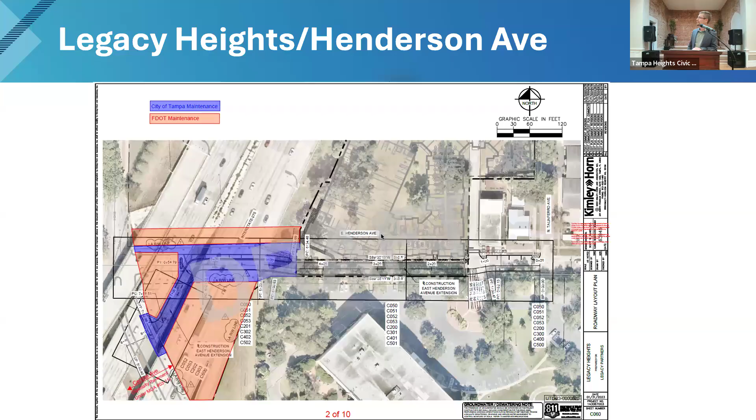The next thing I wanted to talk about is the West River Network build project. You've probably seen some of this in the news, and maybe some of the construction ongoing. I was going to talk a little about the segments on this side of the river.

That would be segment 5, the Columbus Drive segment, and segment 6, the connection down through Ridgewood Park. When all is said and done, we'll have a loop of the Riverwalk system connecting all the way down to Bayshore, giving an active transportation connection throughout downtown and on the west side of the river in West Tampa. But let's focus on the segments in question.

On Columbus Drive, we are building a cycle track across the bridge. There will be one less driving lane, but there will be a protected connection between the east and west sides of the river. We are working with Hillsborough County, since Columbus is owned and maintained by the county, and they are providing some of the funding for this project.

Basically, they are providing the amount they would have spent on resurfacing those segment limits, which go from Boulevard to Rome, past Ridgewood Park. So they're funding part of it because they otherwise would have done maintenance there, but the amenities we're bringing with this project are a step above. It's a true funding partnership between us, the federal government through the grant we were awarded, and Hillsborough County.

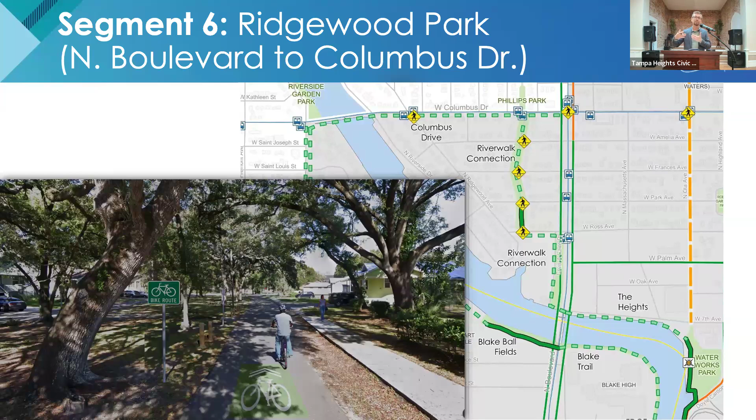So the question was, will we have areas to connect between east and west throughout the length of the Riverwalk? If you can go back to the map - there is a primary connection on the north end on Columbus and then through Ridgewood Park that directly connects back to the existing Riverwalk.

We have some active connections at our crossings across the river, particularly Cass, where we've got what we call the quick build cycle track. Brorein is not part of this project, but we have some preliminary ideas for a potential connection there. Brorein right now has 4 lanes coming across.

It splits into 2 to continue westbound and 2 to go down Bayshore. That decision point can be a little confusing to motorists, and it's not a great place to cross the river as a cyclist or pedestrian. So there's an opportunity there.

There will be opportunities for us to make incremental improvements to the whole network once we're done with this. Some of these things didn't fit into the scope of this overall project, and we just know we'll have to revisit them at some point, or we'll have an opportunity to.

I'll also point out, sometimes this gets asked: you might notice between segment 1 and segment 2 on the west side of the river, the south end of the project, there's a gap where our project isn't touching. There are a couple of things going on there that will help close that gap.

I understand the concerns. Generally speaking, we've seen some pushback on our lane repurposing projects across the board, and we're trying to be very mindful about the public engagement process. Another project I'll talk about is the first we've initiated under new legislation passed in 2024 that builds in a 180-day process between the public engagement and the final design. Some aspects of that are good because they allow us to be mindful about public engagement. Some aspects seem like a bit of a delay, giving people a chance to poke holes in something we think is solid. In any case, that's really the way public engagement works, so we're happy to talk to people who have concerns about any given aspect of one of our projects.

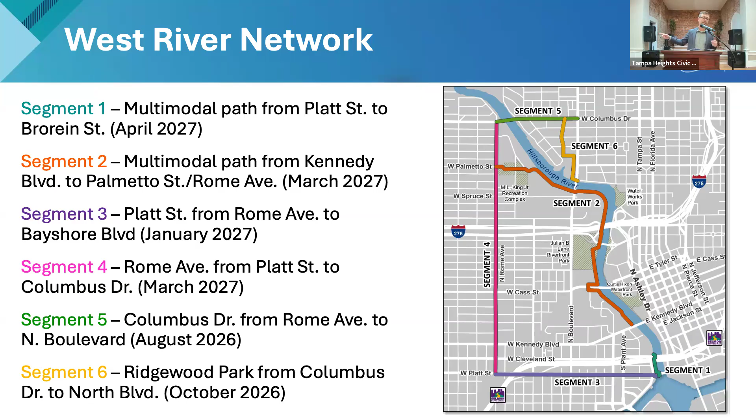So again, it'll generally be a two-lane configuration, but there are opportunities for turn lanes.

I had a question on when you do make comparisons. I'm not even sure if it's the city or FDOT, but the detour signs and all the signs are not current. There'll be a sign that says it's a detour up for maybe 2 to 3 months after it's been corrected. There was a sign on Columbus saying the road was closed when it wasn't. There's a sign I keep passing on the sidewalk on 21st Avenue, which is Floribraska extended, between Nebraska and 15th, telling you to detour onto a one-way street that goes the wrong way.

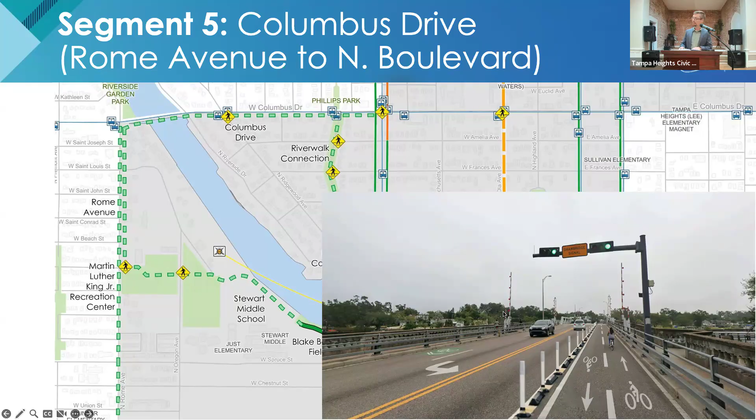All right, so the next thing I wanted to talk about was the streetcar extension. So again, I mentioned the surtax that was passed almost 10 years ago at this point—it's hard to believe—was intended to be the city's fund source for the streetcar extension as envisioned.

We underwent a project development process. We were going to extend to Palm and at the same time convert from the historic replica streetcar to a modernized streetcar. There are some operational benefits to doing that, but there's also a significant cost. So in the years since then, we have rethought exactly how we're going to pursue this project.

This is still early in the development, but we do have a consultant on board to help us through the planning and the reconceptualizing, if I can make up a word, of how this project is going to be pursued.

It will take a while for us to get it through planning, design, and construction. I would say, hopefully Chairman Clendenin doesn't throw anything at me, but I would say 5 years is a pretty fast pace for a project of this magnitude. It's going to be a $200 million project.

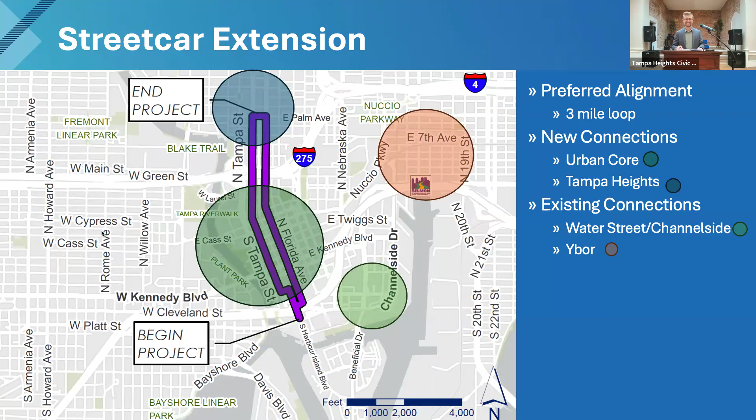All right, the next project that I wanted to talk about, past that. This, of course, is not all the way into your neighborhood, but it is a connection to what is already a low-stress bicycle facility within the neighborhood. So again, we're talking about another lane repurposing project, but this is Morgan Street through downtown.

We have engaged in the statutorily required public engagement process. We've had three different public meetings and had positive feedback when we were able to go through those project concepts with those who came to those meetings. We anticipate this going to construction this fall, and then it should be within six weeks or so for completion. It will build a cycle track and, of course, resurface the roadway as well.

It gets basically, I'll say, from Water Street up to the Marion Transit Facility, and then once you go underneath the interstate and up into the Heights, we'll add sharrows to that facility as well. Yes?

No, it doesn't go quite that far north. When you get to, I think it's the block between Harrison and Fortune, we have partial brick, and it's real wide, and then it just kind of narrows way down as you get past the cemetery—I'm blanking on the name—but there's not sufficient width to actually reconfigure those lanes as you pass the transit facility and cross Scott Street. So no, that's outside the limits, but as with all of these, if there are incremental changes that make sense after the initial project, we're not going anywhere.

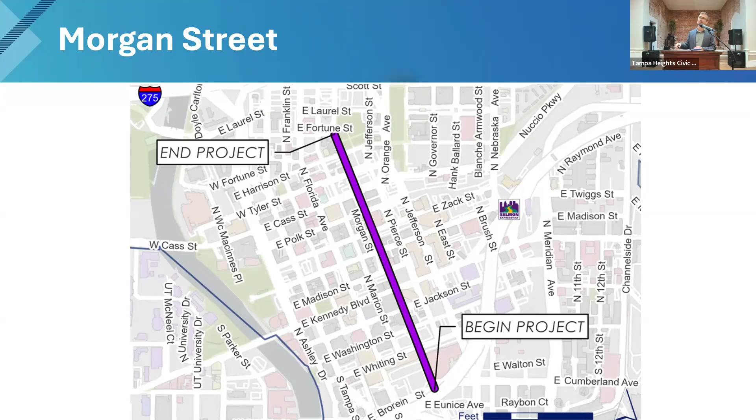All right, next. So this one is part of our Safe Streets for All grant. I think it will probably be of interest to you in part because in some ways it's a continuation eastward of the Floribraska project. These are just concept plans, and honestly I think that we'll likely change some of the configuration as you get into Ybor.

But this is the westernmost part of these concept plans. It is a continuation of the bike lanes from Floribraska through 21st Avenue, at least to 15th, where the green spine comes in—that's the final segment being constructed of the green spine. To the east of 15th, our concept plans still show bike lanes on either side. There are competing interests and needs there that I think we might have to rethink, but getting it to 15th, I think, is going to be a positive change to connect with probably our most well-used cycling facility in the city, which is the green spine.

Yes, sir, real quick on orientation. Well, what's that? Oh, I'm sorry.

Yeah, this one going west. Yes, you asked about the orientation.

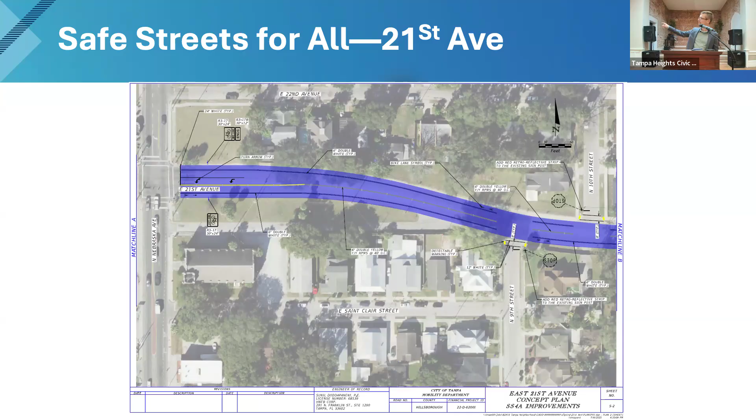There are a couple other slides. The concept plan is like 10 pages long, but I just took the western edge, and then the next one is like the center. You can kind of see we're maintaining one through lane in each direction and turn lanes as appropriate.

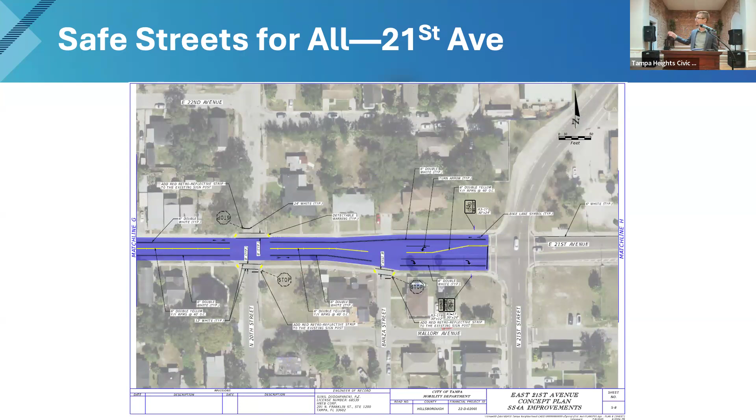And that's 15th. This is the second one, I anticipate it might change, but as the concept shows now, it takes it all the way to 21st, I believe. So this still has final design to go.

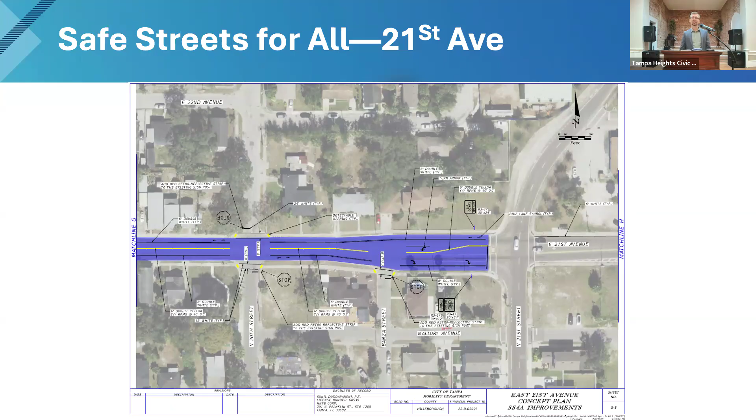The next thing I wanted to talk about was also a Safe Streets for All grant project, though it was a separate grant, one we were awarded the following year. The stringencies of this grant are a little higher, so we're actually still working through a grant agreement with the federal government for this project.

But the intent of it, however it ends up being fully scoped and constructed, is to look at the Palm Avenue segment from Nebraska all the way to 21st. In particular, the four-lane section through Ybor operates at a higher speed than we'd prefer. It's part of our high injury network, and we want to bring safety improvements to it. We're working through the scope with the federal government.

This grant is actually a demonstration grant officially, as opposed to an implementation grant, which is maybe more in the weeds than I need to go with you all. But that's why we can't just implement what we'd fully want to. We're working through exactly how we can best scope something acceptable to the federal government. I don't have a date because we're still working through the grant agreement before we can start design and construction, but it is coming.

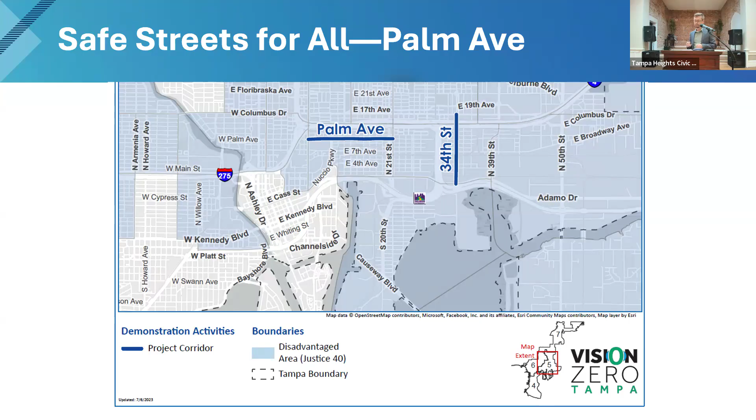Basically, the Ashley Drive southbound ramp where you split off and get to Tampa, the bridge over that is coming down to grade. We're going to eliminate that split, and at roughly the same time, FDOT is going to add capacity for the right turn from Scott to Tampa, so those trying to get to Tampa have a place to go. We'll also have a better east-west connection, basically from the river on the west of this area, down Laurel Street, into the downtown grid.

Something this is going to help enable is the redevelopment of the Army-Navy parcel and the Royal Regional lot. We're working, not my department, but as a city, with a developer to build some affordable housing and go vertical, where right now it's just a mid-sized surface parking lot and a vacant building. That will likely also go to construction in 2028, and we're again trying to coordinate between multiple interests, not competing interests, but multiple interests in this area.